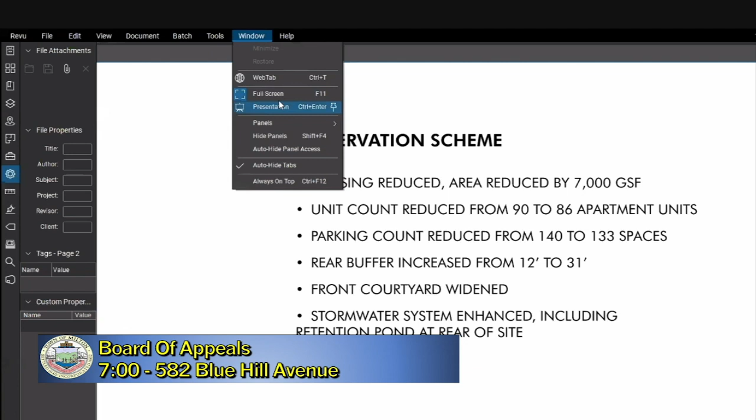I think with that, Daniel, if you don't mind pulling up, I'll walk through the first couple overview slides and then turn it over to Daniel from our office to walk through in more detail. Sure thing. Oops, excuse me, just give me one moment. There we go. Awesome, thanks Daniel.

So essentially from the last round, what we've done, as Jesse alluded to, is a further reduction in the massing to address comments around the north end of the north building, and then the 2-story piece that abuts the residential at the rear. We've reduced by another 7,000 square feet the gross square footage for the building. That's really pulling back so we can open up the views to the historic home and reduce the most impacted area, the 2-story wing that came off. You'll see that in the set of drawings. What that's done is taken it from our last round of 90 units down to 86, and with that we were able to also reduce the parking from 140 to 133.

With the modifications in the rear, our buffer went from 12 feet, now we're up at 31 feet, which is quite a substantial improvement in that area. In addition, by pulling back the building in front, we've been able to widen the front courtyard. You'll see tonight as well the stormwater—we understand the concerns around that, and we've been able to really heavily look at shifts to have an enhanced stormwater system, including a retention pond at the rear of the site with the site modifications we'll present tonight.

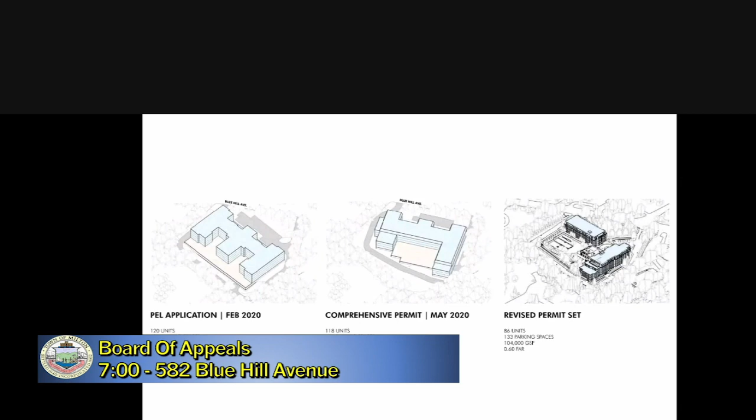I think at that point, Daniel, if you don't mind jumping in, would be awesome. Sure, absolutely. So just to go through the metrics, kind of get this out of the way—as D'Artagnan mentioned, we had reduced the mass of the building pretty substantially, so now we're at 104,000 gross square feet total for the project, which is a 0.6 FAR. We're at a 4-story building height, 133 parking spaces, and we have largely...

Mr. Chairman, unfortunately, I'm having difficulty hearing Daniel. It might be as simple as him getting a little bit closer to his microphone. Sure, does that help? A little bit, thank you.

Okay, I can call in too if that's helpful. Mr. O'Brien, can you hear Daniel now? I can hear you fine. Mr. Riggs, if you just lean a little bit into your microphone, it picks you up better. Does that help, Frank? Mr. O'Brien, sorry. Yes, it does, thank you.

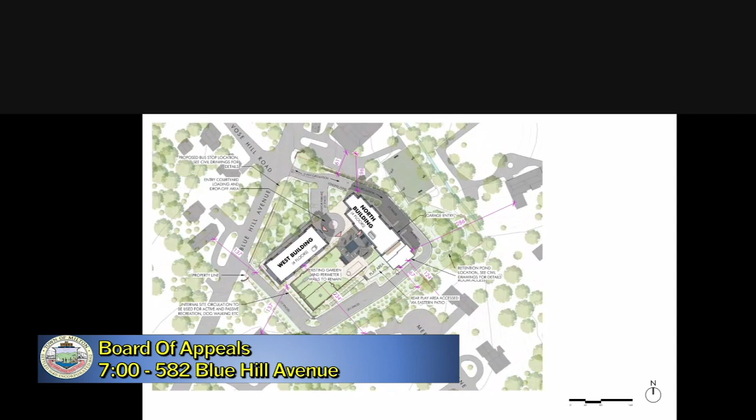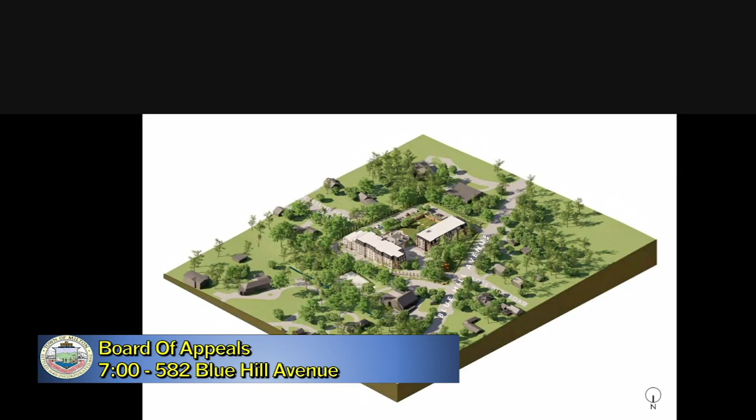Excuse me, Mr. Riggs - I don't ordinarily like to interrupt, but can you speak to the level of design you're at now, and how that relates to the level of certainty you have about the renderings we're looking at? Is this what the project's going to look like in your opinion, or is this an approximation of what the project will look like? In particular, I'm thinking about the color, the exterior features, the roof, the things that are on the roof or elements on the roof - some of the finer details.

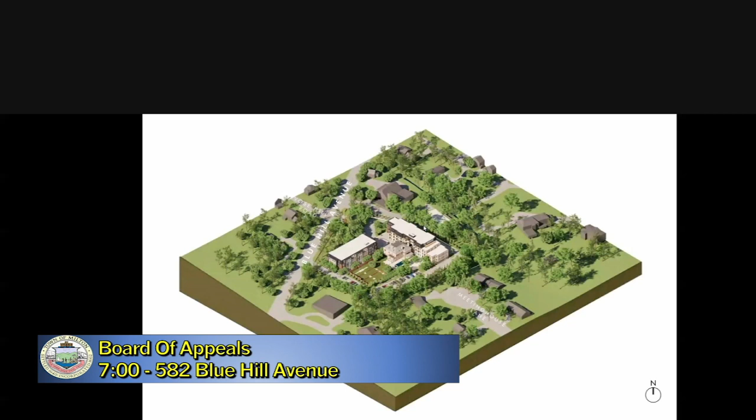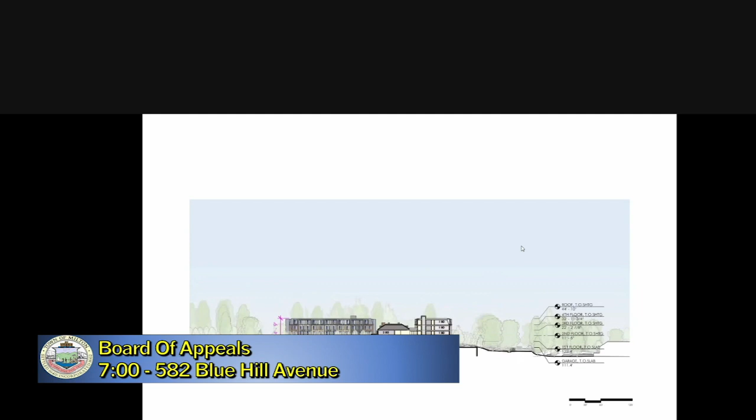So we've taken a chance to represent that. Obviously the trees aren't exactly the same trees here, but they're intended to represent the similar heights and density that you see on the site.

We've taken two views of this, and I know this could be confusing. The bottom image is intended to hide all of the trees that are existing and off of our property that would be remaining. This is just to give you a sense of what this building might look like in the absolute middle of winter, and to show the relative height from Meeting House Lane.

Again, you can see here the chimneys of the existing building and our new addition, where you really see the 3-story volume. But in reality, the existing tree growth really covers a lot of the building and dominates the height from this viewpoint.

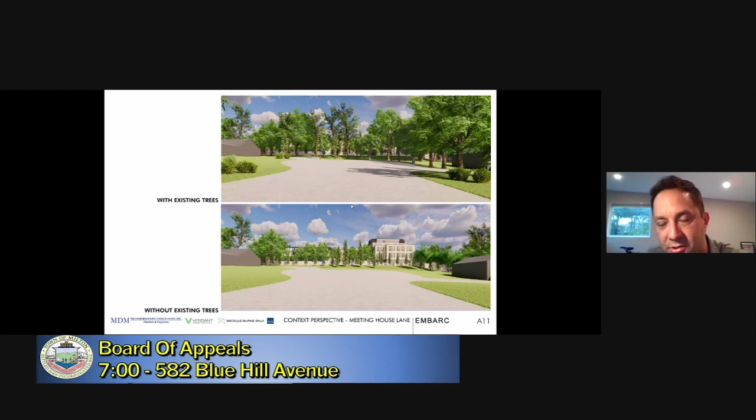Absolutely. And we have the benefit of having this large scale existing tree growth on the site. As you can see in this bottom image, which shows the plants we're proposing, we're planning on adding another layer of density to the plant growth on the rear of our site.

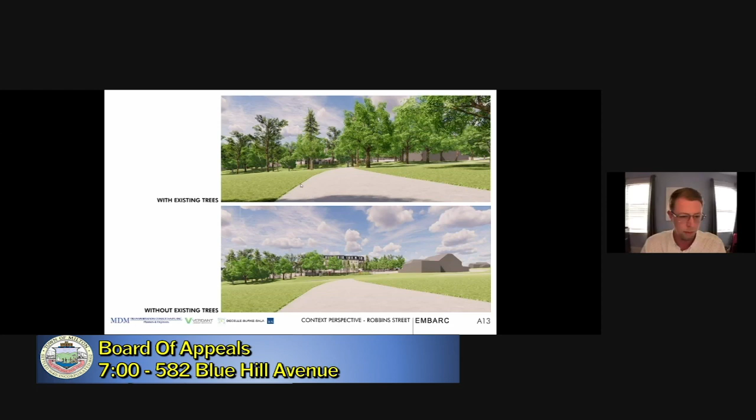And this is a very similar study from Vose Hill Road. Looking back at the site, part of our whole thinking about the positioning of the west building, and why we didn't want to move it further away from the garden, is that we feel confident in the shadow studies that the garden won't be seriously affected by the west building shadows. So we really wanted to keep that positioning so that it allowed for the existing tree buffer at Blue Hill Ave.

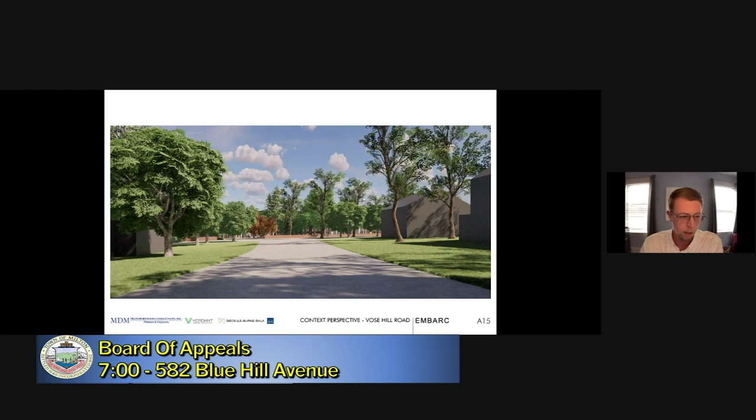This fourth image is taken from Blue Hill Avenue, looking north on the site. You can see that on this key on the left here.

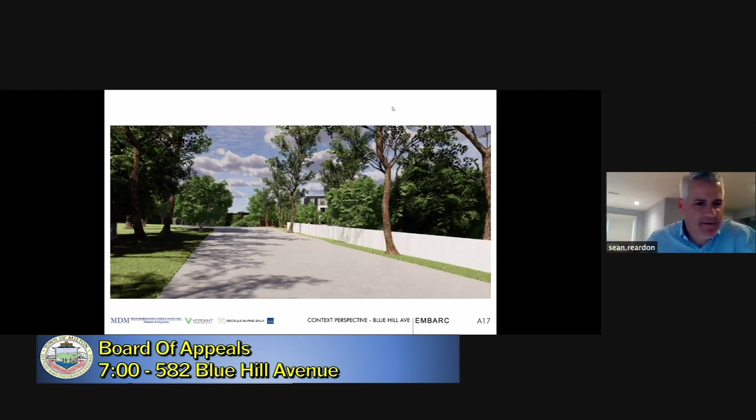Oh, Daniel, I think you're frozen. Can anyone hear me? Yes, I can hear you. Oh okay, Daniel, I think you were frozen there for a second. Can you hear me now? Yeah, I think you were just getting to this image. Sorry about this, it's the beauty of Zoom, right? I'll just start again on this image. So taken from Blue Hill Avenue, looking... Daniel, we lost you again. I can jump in here. Can you hear me? Oh, now I can. Yeah, okay, sorry about that again.

So, Blue Hill Avenue, and this is our building as proposed, with the 35 to 40 foot exposure of the building shown here, and the entry off of Blue Hill Ave.

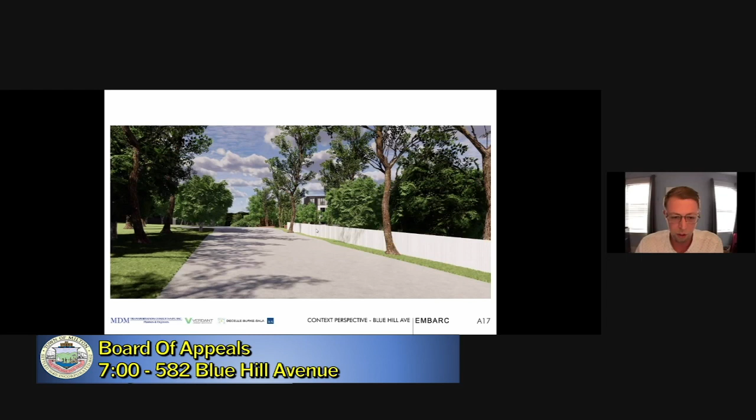And then just to quickly go through the floor plan: this is our garage floor plan. With the reduction in massing, it's allowed us to really reduce the width of the surface road where it interacts with the rear property line. We've also revised some of our utility spaces in the basement to incorporate additional bicycle storage and trash storage, as well as that clear maintenance connection at the back.

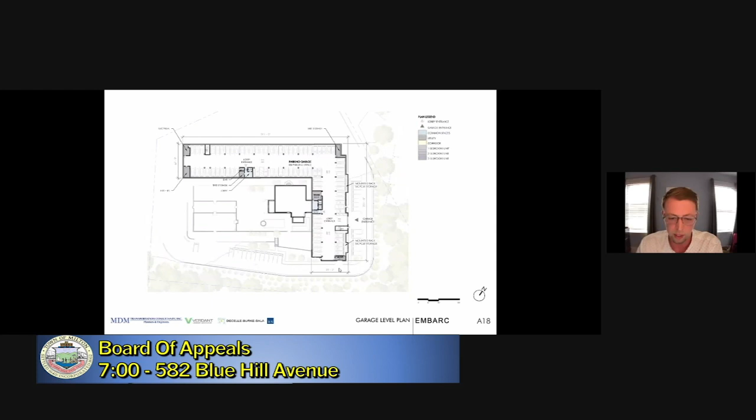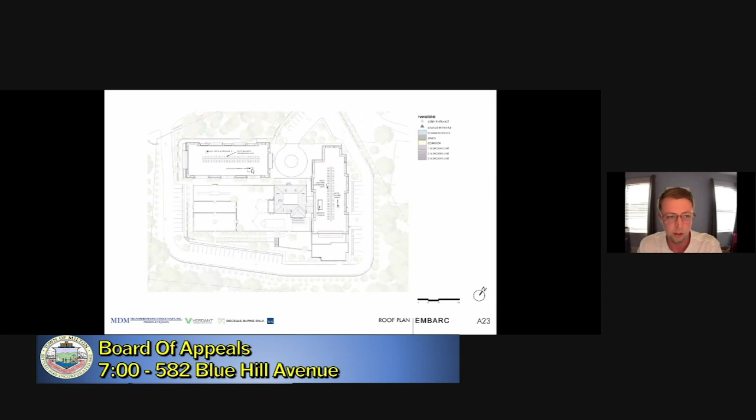The roof plan here shows the anticipated condensing unit locations, as well as elevator overrun, roof access hatch, and those kind of more technical elements of the building.

So again, here's our elevations for the building, very much in keeping with how we're planning on developing this project. This is very accurate to what we're planning, going as far as to color code and call out the materials. Lap siding throughout a majority of the building, with some panel accent pieces, as well as differing colors through that fiber cement lap siding to break up the building mass as it moves around.

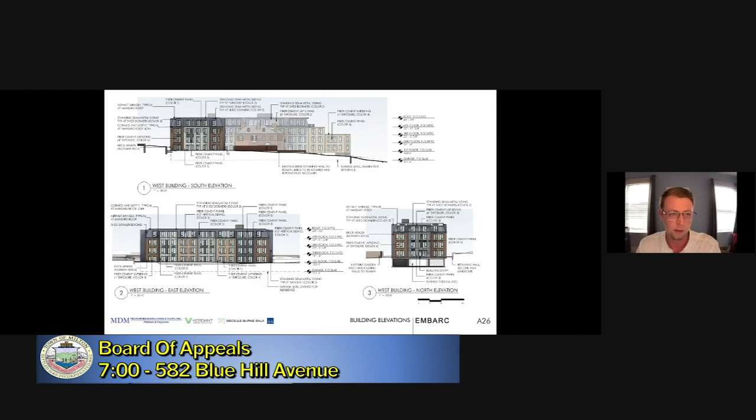This is a further elevation, the west south elevation, looking at it with Blue Hill Ave up here, sloping down. Again we have this accent panel in the center with two brick pieces flanking it. On the face that faces back to the historic garden, we're allowing these vertical pieces to segment the building and create breaks in the facade on that side.

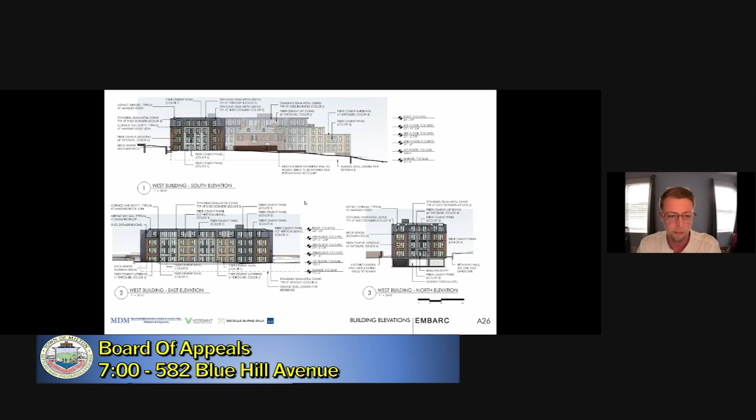This is a closer in building section, focusing on the west building itself where it cuts through the garage. You can see the garage buried into the topography fully at this point, and the way the historic garden terraces down towards the rear of the site, along with the 4-story height of the building with the top floor incorporated within that mansard roof structure.

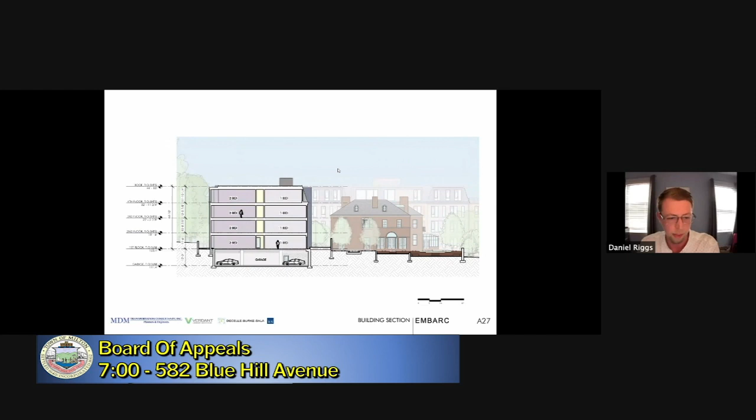These are updated sun shadow study diagrams, largely the same diagrams you had seen previously, updated with our revised massing. I won't go into these in too much depth, but you can see our sun path diagram here that corresponds to where the shadows are taken from. This arc represents the path of the sun on this day.

This first slide is the summer solstice. Starting at 9 a.m., the sun is in the east, shadows going correspondingly away from that. At noon, very little shadow impact. At 3 p.m., again from the west going towards the east, and at 6 p.m. there's the most shadow impact for a small period of time as it goes in that direction.

Fall equinox, largely the same story. At 9 a.m., again you can see the change in the sun path. Noon, 3 p.m., again here just showing basically impact on the courtyard itself, and 6 p.m. where obviously there's the least amount of daylight at that time of year.

And this is the winter solstice, where the sun is at the lowest angle, as you can see in this path diagram, from 9 a.m., noon, and 3 p.m.

Generally the location of the garden is largely unaffected by the shadows because of the orientation of the buildings on the site. As you can see in the compass here, north is generally that direction—the north building is really northeast, and the west building is really northwest of the historic garden.

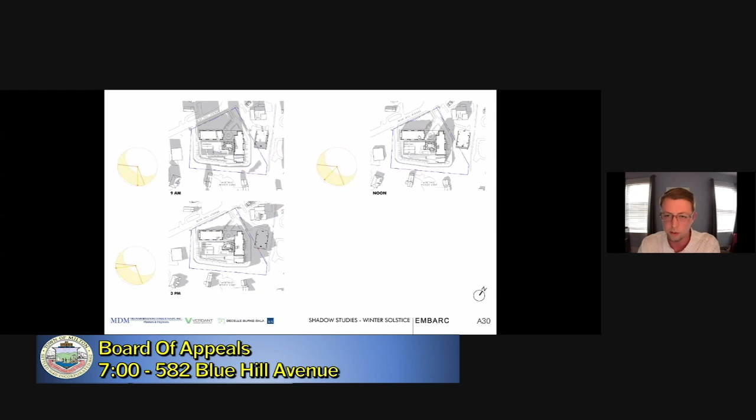And the spring equinox, again this is very similar to the fall equinox.

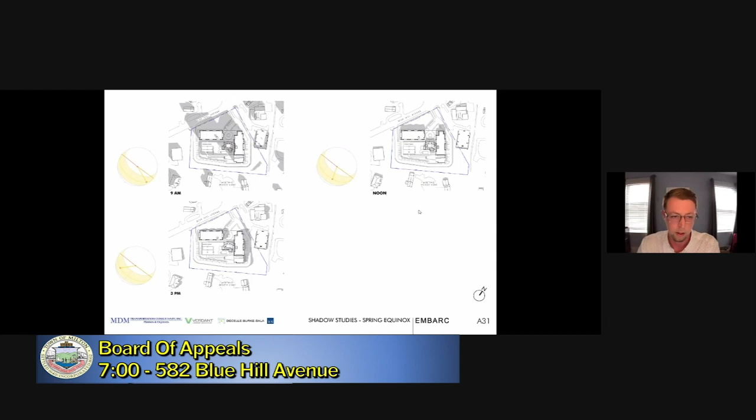This is a photometrics study that we had conducted, done by a third party—OmniLight, a vendor who will be working with us again as we continue to develop the drawings and lighting package.

What this really shows is the intensity of light on the site, measured in foot candles. Essentially, the higher the number, the higher the light shown on site, and the colors here correspond to that as well. Most of this is provided for safety of the building itself, for navigating the drive, as well as entering the building and for emergency egress.

The use of dark sky lighting really directs most of this light down, which is why you see it happen in these small pools. The majority of which do not go past the property line, with a few exceptions—small spillage on the Delphi Academy property—but otherwise containing the light within our site, directing it towards the ground, and trying to minimize that impact as much as possible.

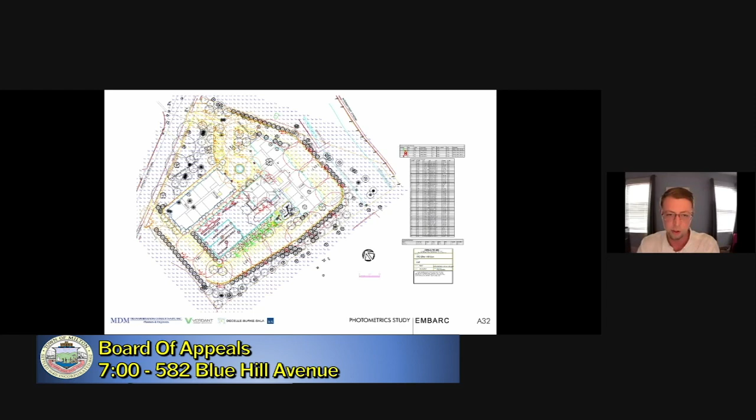Here is a rendering from Blue Hill Avenue of our revised project. You can see the smaller face of the north building towards Blue Hill Ave, creating this larger view shed towards the existing home, and using some contrasting materials. We're taking the brick and using it at just this portion of the north building, and allowing a contrasting material here, in this case a lighter fiber cement lap siding with fiber cement accent panels, to contrast the house and let it really stand out on its own.

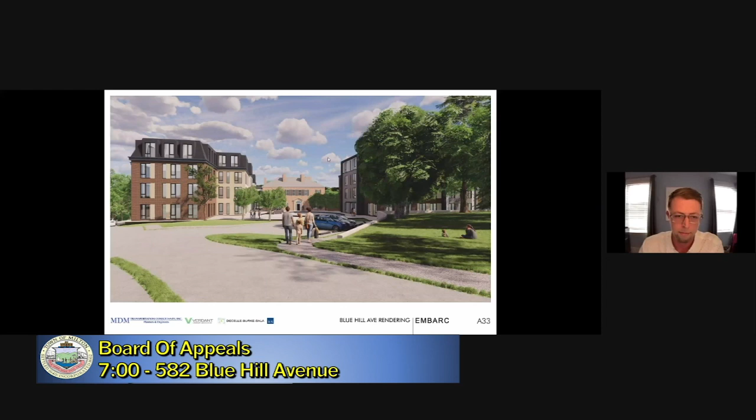This is a rear garden rendering. It's largely the same view we looked at previously, but taken from a lifted perspective to really see the entirety of the site, and the way all the structures interact with the historic garden.

With that, I'll turn it over to Blair Hines from Verdant Landscape Architecture to go through the landscape architecture component.

Can you hear me? Yep, good. Okay, very good.

The overall landscape approach is based on a lot of the feedback we received on the site walks: the preservation of the existing mature trees and plantings along Blue Hill Avenue, and of course the focus on the historic Shipman Garden, but also on the mansion as well. So this has really been the main guide in terms of how we've been thinking about designing this.

The proposal is basically to have a courtyard developed between the two proposed buildings, and then to make some modifications to the patios to the south of the existing mansion, which will be the amenity space, in order to make that grade at the same elevation as the interior space, so that you have ADA access. The idea is that the slope would then go towards the historic gardens, so that at least the upper terrace would be fully accessible, and the lowest terrace would be accessible through a pathway.

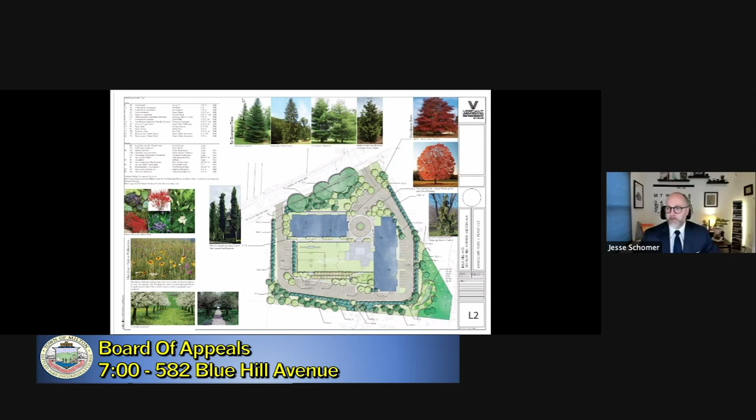I have one question regarding the landscape architecture. This is a helpful rendering, let's leave it on the screen. As I understand it, this perimeter road along the north, east, and south sides of the property will be elevated for most of its length. My question is what will that look like from the various elevations and from the remaining yard. That's the first question. The second is, how do you get there?

Are you asking how you would get from the building to the lower areas of the site? Yeah. Well, I think we would have some steps down there, or at least an opening for maintenance and for people who might want to go down to that area. We don't expect that to be a particular focus of residential living here.

We see that as primarily buffering of the development. I guess that's my question, and I wonder if that's fair. That's your proposal, but if so, we ought to know it. In other words, this is not intended for active recreational space. Absolutely, it's buffer - these are your words, not mine. I don't mean to tell you what to do, but I want to understand it, because I think it may matter what it looks like. But secondly, my guess is if it's not easy to get to and it's not large, it's not going to be used and will become a bit of an orphan. It ought to be designed that way.

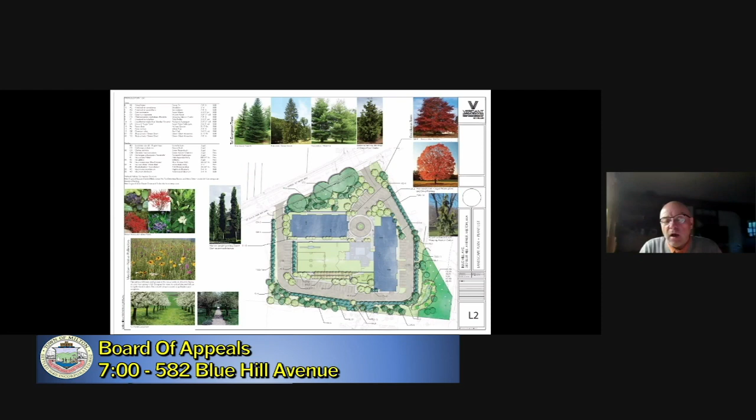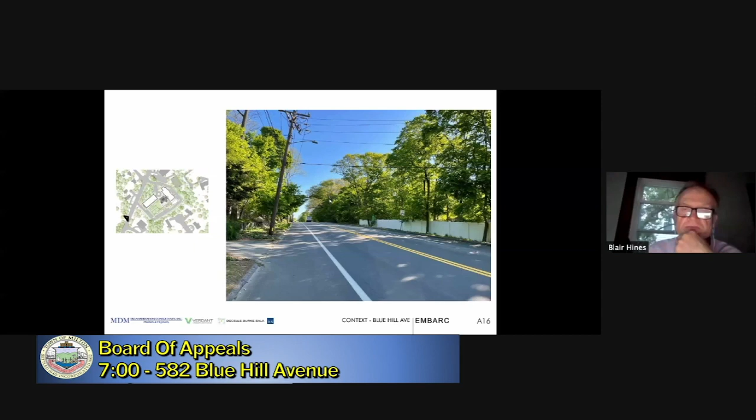And lastly, not that this needs addressing tonight, but I appreciate the perspectives Mr. Riggs showed. I think it would be helpful to see what that wall looks like from the property lines. There's going to be a wall, right? Yes, it is a wall. Sorry, let me try to locate that. I believe you're referring to this wall here - yeah, that's just difficult to see.

You mean in terms of actual materiality? No, I remember from the site visit that the folks in that neighborhood - that was a particular point of interest for them, so I think it would be helpful to pay attention to it. Yeah, so we're representing some of those taller evergreen trees that Blair mentioned during his presentation. He might be disappointed in how they're rendered in this view, but the intention is that there's a whole outgrowth of those, plus lower plantings, filling the area between the property line and that wall to help largely mask it.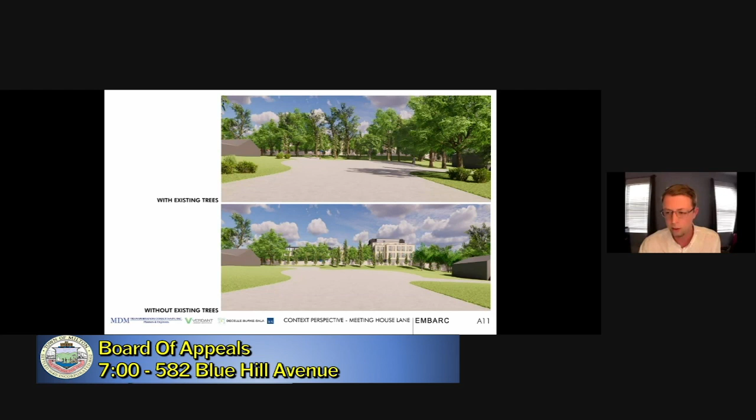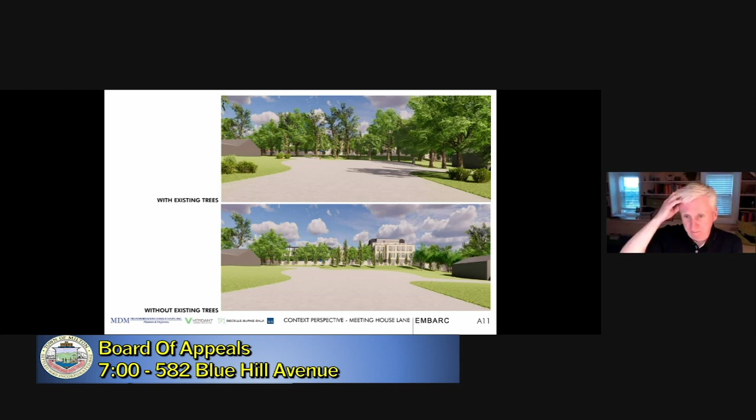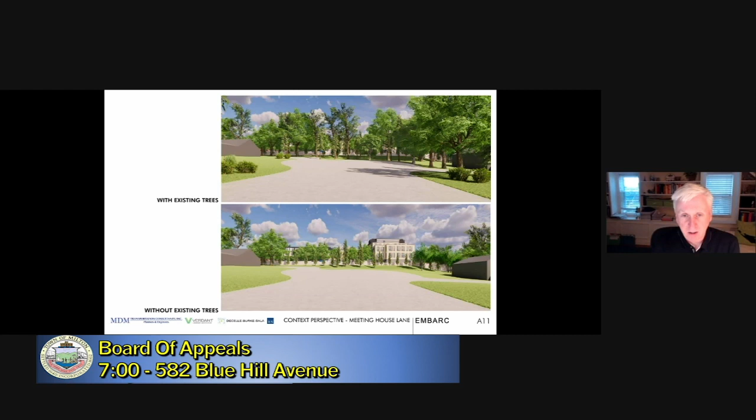Fair enough. If I may, Mr. Chairman, Mr. O'Brien - it also gets into the comment you made earlier about finishes, textures, colors, that sort of thing. I understand the rendering provided is just that, a rendering, but I think that bears mention and reflects back on your earlier comment about finishes and colors on the larger proposed building as well.

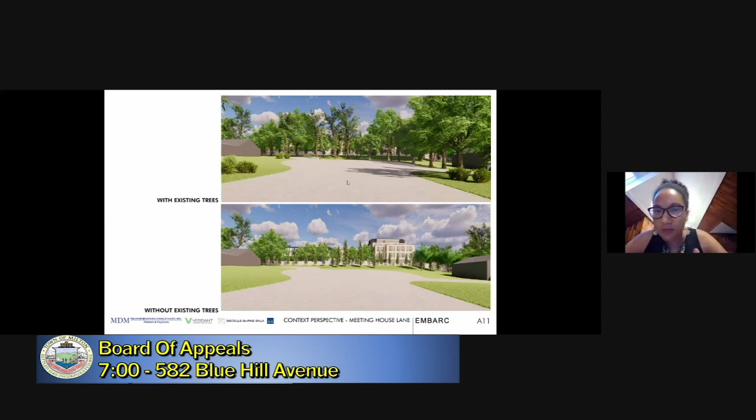I do have one question, about the symmetry of the design, and also from the perspectives, which are useful, trying to put yourself in the position of someone in the buffer looking at it. There seems to be this part of the building that just goes past the garden, right? If we can look at it like an aerial view of the design - let me find a better view, sorry about that, just go through here, give me one moment.

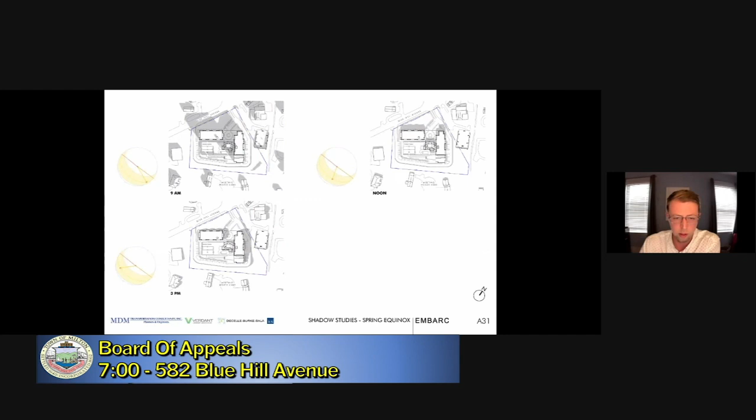Is that more helpful? It is. So if you position yourself on Meeting House Lane, you can see a tree line, then a parking lot, then another tree line bordering the garden. If you follow that line up, there's this extra part of the building that goes beyond the gray top floor. I don't know how you're referring to that, but I'm just wondering how many units are in that space, which from a design perspective feels like an add-on to me. But really, my question is how many units are in there?

We're counting right now. Okay, sure. Do you want me to look, Daniel? Yeah, if you don't mind. No, no problem.

And maybe more big picture, what I'm trying to assess is what is gained in terms of units versus what seems like a lack of symmetry and also increased building view for the neighbors.

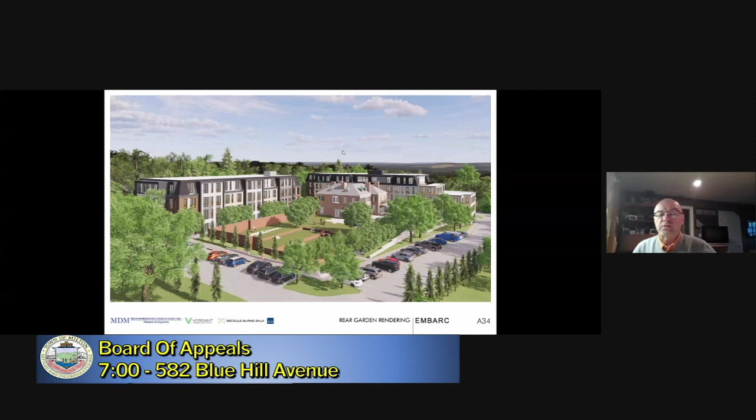Okay, any further questions? No, thank you. Not for me. Okay, maybe we ought to finish with the applicant's presentation before we open up questions to the balance of attendees. Does that work for you, Mr. Schomer? Yes, Mr. Chair. Okay, please proceed.

Thank you. We'll turn it over to Jim Burke to talk about site civil. Mr. Burke. Good evening, everyone. You can hear me okay? Yes. Excellent.

So we've done a decent amount of work since the last time we talked, and even when we started. You're looking at the existing conditions plan right now, and those red dots are all the soil exploration we've done across the site, giving an idea of the continued effort to determine soils and groundwater elevations for the property to help us with the design. You want to click down to the layout?

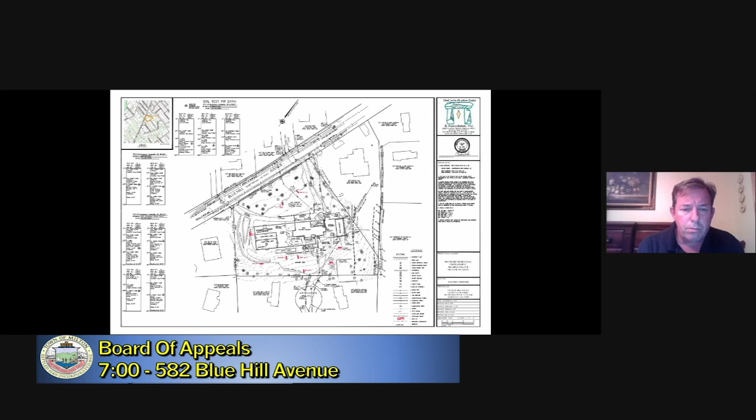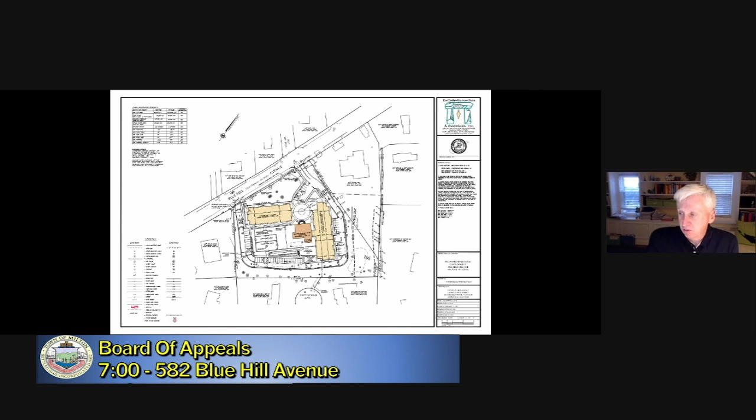So this is our grading plan. I wanted to jump into that conversation about the rear retaining wall. That wall, for the entire length of the back until it gets towards the detention basin, is about 2 feet high. In some instances on that curve, we can probably eliminate it entirely and alter the grading slightly. The wall has been significantly reduced.

We have a 3-to-1 slope leading up from the property line to allow Blair to work his magic in the landscaping end of things. The retaining wall has been significantly reduced in that area, and the same can be said for along the northerly property line as well.

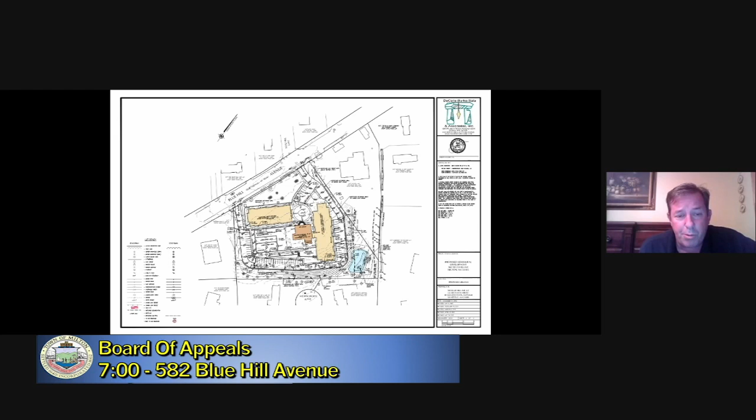The retaining wall gets to its highest at the detention basin, about 13 feet in that location. You can see how the contours from the east side towards Meeting House Lane disappear into the wall, indicating where it grows largest. We still have the 2% leveling areas at each access and egress driveway, then it comes down to a maximum of 8% leading to the rear of the parking lot, which crosses at 1%.

So here's the revised stormwater management. The dark blue areas are the infiltration system, and the light blue are the detention basins. The one to the north, at the northeast corner, is the surface detention basin within the wetland buffer.

There's a light blue square centrally located just above Meeting House Lane, maybe a little south of it, which is an underground concrete chamber also used as detention. The darker blue areas are strictly related to infiltration, and they are sized to meet the stormwater management standards for that purpose solely.

For water quality, we've included I think 3 proprietary CDS contact structures, and their purpose in life is just to remove sediment and pollutants from the stormwater. What we originally designed was more single retention/detention structures that also provided water quality. Now we've spread the wealth around to everything, individualizing the structures to do their jobs in a more individual manner.

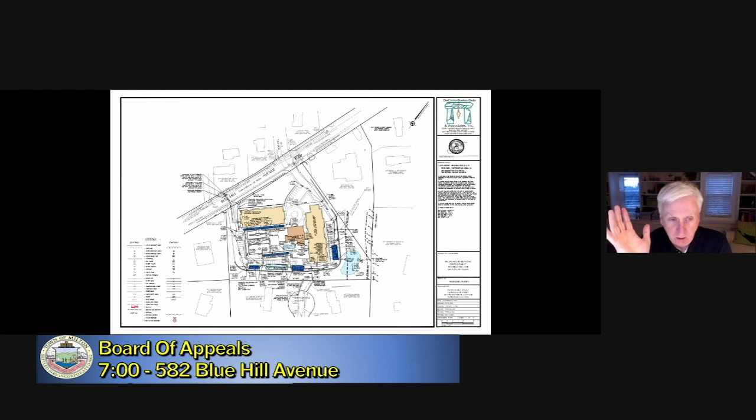And I'm hearing phrases like we're going to spread the wealth and it's going to go in a lot of other different directions. Given everything I've heard during this entire hearing, I'm getting concerned that I may start to get water where I hadn't had water before, or I may start to get more water where I already have water. My problems are going to get worse.

Well, help me understand how this is going to solve the problem, and put it in English. So, the problem was solved originally as well. There was some— Well, I beg to disagree, because, and I don't want to be argumentative, but I entirely disagree with what you just said.

To me, nothing seemed to be settled. Nothing seemed to work. As a consequence, that's why we've had a number of iterations. So you have to help me understand how this works.

Okay, so the stormwater management guidelines have certain specific criteria that we have to meet. The second one is the detention features. We have to detain—we cannot have any sort of increased flow off-site that would cause flooding impacts to downgradient property, wetlands, or abutters and the like. Okay, right, gotcha, all right.

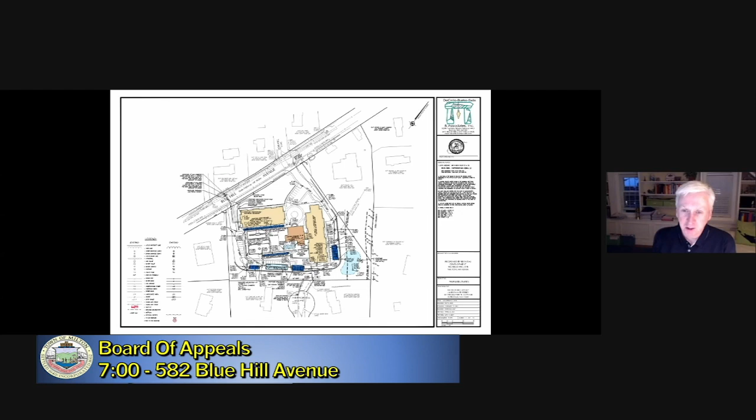You're welcome. I have one comment, I'm going to hand it back to Mr. Schumer. I think you said, Mr. Burke, that the perimeter wall was 2 feet. Yeah, so it runs 2 feet along the rear, goes to 13 feet at the basin, then runs back up around like 4 feet, disappears, and then goes 2 to 4 feet up to the front. It looked like it was more than 2 feet on those elevations we saw, so let's just clarify that, not tonight. I think we need to move on — Mr. Hill specifically asked for some time, and I granted it to him.

So I'd like to move the hearing, but I do make that point. Mr. Schumer, is there anything else?

Just one comment, Mr. Chair, hopefully in response to Mr. O'Brien's questions regarding the drainage system. One thing not mentioned tonight is that this change, by putting work within the 100-foot buffer zone, means this project is now required to file a notice of intent with the Conservation Commission, which means it will be subject to oversight by Mass DEP.

Part of the challenge for zoning boards is that the comprehensive permit process asks you to be not only the zoning board, but also the planning board, the select board, the Conservation Commission, and every board that issues local permits. But this project change now puts a second level of review for this drainage system in particular.

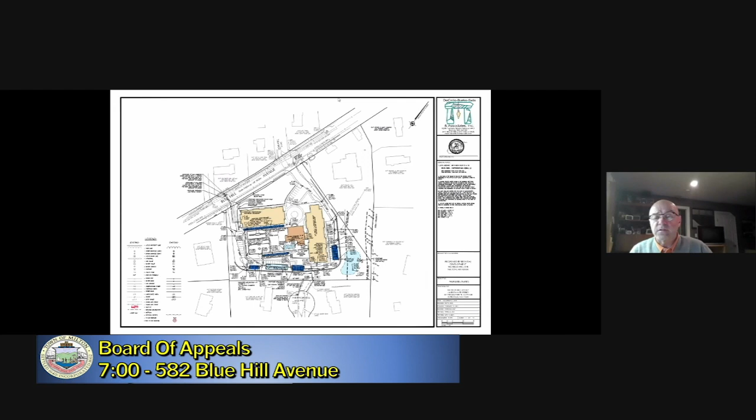Let me also make the point that Mr. Czerwienski, if you could alert the Conservation Commission to the fact that an application for an order of conditions was submitted in connection with this project, I think they'd be interested in hearing that. Let's make sure the Conservation Commission has the opportunity to participate in this hearing to the extent they want to. They were active in another hearing I heard under 40B some years ago. So that's just a side note, but back to you.

Yeah, go ahead. Mr. Chair, I've included the chair of the Conservation Commission in all of my communications with other town departments and boards. So they've gotten all these materials, but I will make it my business first thing tomorrow to flag this for them so they can ready themselves for that application coming in.

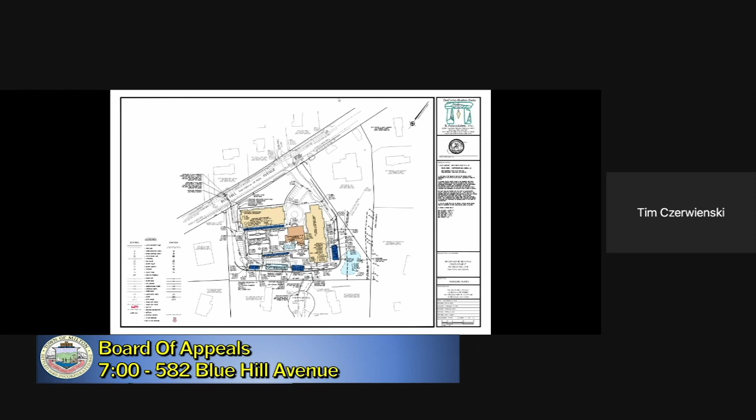Terrific, thank you. Mr. Schumer? That's all from us, thank you very much. Mr. Hill, Ms. Batista.

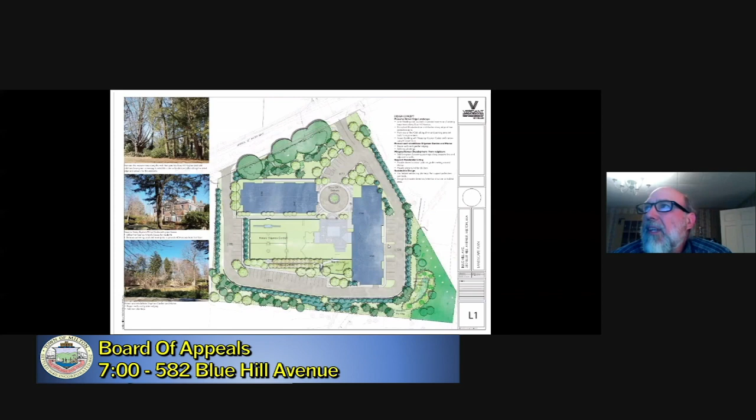Thank you. The first point I wanted to make is about the garage, which is an underground garage below the building. If we look at the civil engineering grading sheet, I believe sheet 5 or 6, underneath the west side there's a garage. The garage is excavated down between 13 and 15 feet.

The closest test pit to that area had groundwater 2 feet down. So at that location, it's about 12 feet of cut into the seasonal high groundwater table. That garage extends across pretty much the whole width of the lot, so you're going to be intercepting groundwater, which needs to go somewhere, but there's nothing on the plan that shows how that would be handled. I think that's a significant issue.

It's similar to another project being worked on in Milton, a 40B over on Canton Ave, with similar issues. The groundwater's got to go somewhere. Otherwise the garage is going to be damp, and you just can't have that type of situation. As you look at the building, the west side, and go to the south of it, there's an infiltration system very close to the garage foundation wall, certainly within 10 feet or less, probably like 2 or 3 feet.

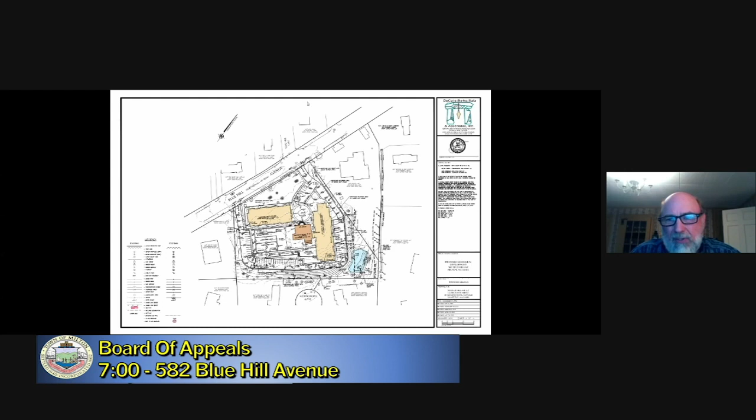On the construction end, if you look at the south side by Meeting House Lane—maybe go to the next sheet, sheet 6—the connection to Meeting House Lane, that pipe needs to be replaced. According to the report, it's collapsed, so they'll have to replace that pipe.

If you can follow on the plan, I know it's very small, there's a pipe essentially parallel to the property line, just a few feet off based on the size - manholes, it's probably like 2-3 feet off the property line, at most 4. So you're going to excavate all of this to put in a pipe. And what's that going to do to those trees that they're showing in all the landscape plans to be saved? When you dig up all the roots, you probably kill the tree, especially if it's a mature tree. There doesn't seem to be - there's a disconnect between what you have to do here and what you're trying to save.

They're going to replace the drain. I believe they're going to replace some of the sewer, but that's mostly on the site. I'm not sure if they're doing anything in there, but there's going to be excavation all through that area to replace those pipes, which is going to damage the trees. And if they're big trees and it digs up half the roots - I'm not a landscape architect, but I did go to forestry school for a while. I have a pretty fair sense that's going to probably damage the trees.

Lastly, I want to thank Mr. O'Brien. I totally agree - there should be an analysis of the pipe system it's being tied into and the stream system that's being tied into. The stormwater analysis basically is just a box that covers the property line. It doesn't cover the whole brook. It doesn't cover the whole pipe system.

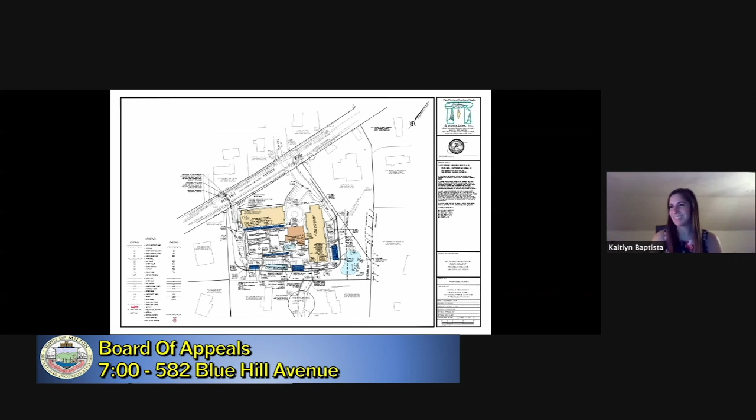Yes, I have just a few additional comments to Mr. Cheshire. My first one is that with the redesign, the project is now within the jurisdiction of the Mass Wetland Regulations and another program that I don't believe was discussed tonight, but it's a really important one - perhaps one of the most important water quality programs in the country - and that's the US EPA Mass DEP MS4 program and permit, which Milton is under.

Milton has a stormwater bylaw, which is required under that program. Relative to that, Jim Burke mentioned tonight that he thought it would be good to have the project stay out of the buffer zone. I'm paraphrasing, Mr. Burke, I apologize, but essentially that's what you said.

But then you continued and said the project was too large for the site to handle the stormwater. I think that tells us a lot. Let me go on to comment number 2. The project now proposes 5 infiltration basins and a detention pond. Mr. Burke mentioned he hadn't designed one in a long time.

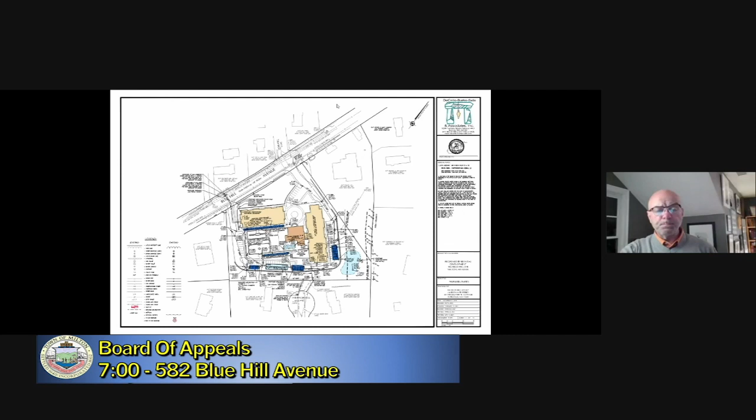So I will stop there, Mr. Chair, and be happy to answer any questions. Thank you, Mr. Horsley. I don't have any questions. Do members of the board have questions for Mr. Horsley or Mr. Chessier?

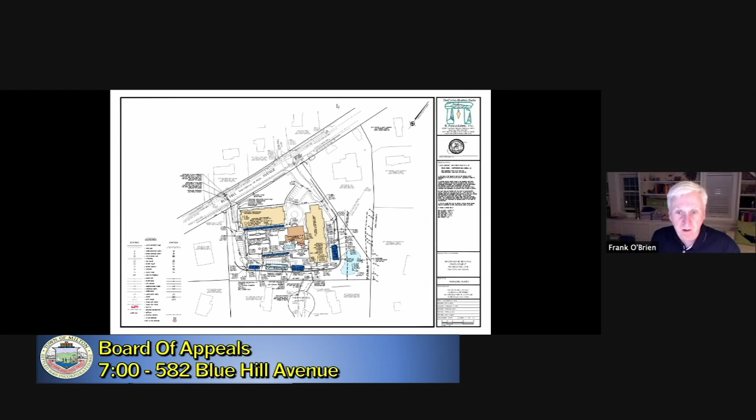Mr. Chairman, just briefly, I assume that both of the prior witnesses will be providing the board a writing that will summarize their comments. Yes, that is the plan after we've had the opportunity to do a more thorough review. Ms. Baptista, anything else? No, that was all.

Before I open the hearing to public comment, Mr. Reardon, I wonder if you have anything you'd like to add at this time. You don't feel obligated, you're the peer reviewer. I just want to give you an opportunity to be heard if you'd like.

Sure, just a couple brief things. First and foremost, we have reviewed the materials, at least cursorily, not thoroughly yet, but what I have seen is demonstrably better than what we've gotten in the past. So I want to make sure that is noted. In my opinion, it demonstrates a much bigger and better command of the task at hand, and I think it's shown in the extent to which the system has been modified.

But in fairness to Jim, I think we're a lot closer to the mark than we have been in the past. That being said, I think Mr. Chesia and Mr. Horsley bring up interesting comments. I think you'll see comments of a similar note in my letter, as well as some other things. But I do think we're a great deal further along in a feasible system than we were in the last go around. And then real quickly to Frank's comments,

Very explicitly, the stormwater standards require you to reduce or equal the amount of peak runoff from your site. So under no circumstances will they be allowed to discharge more stormwater runoff at a peak time than under existing conditions. So just so we're clear on that, they will never be allowed to discharge a higher rate of runoff at a peak time than they currently do. So in terms of the downstream capacity, I think to Jim's point, the logic that the project will not result in a decrease in function of the system is valid, but there are some existing legacy issues that need to be looked at, and we can certainly comment on that.